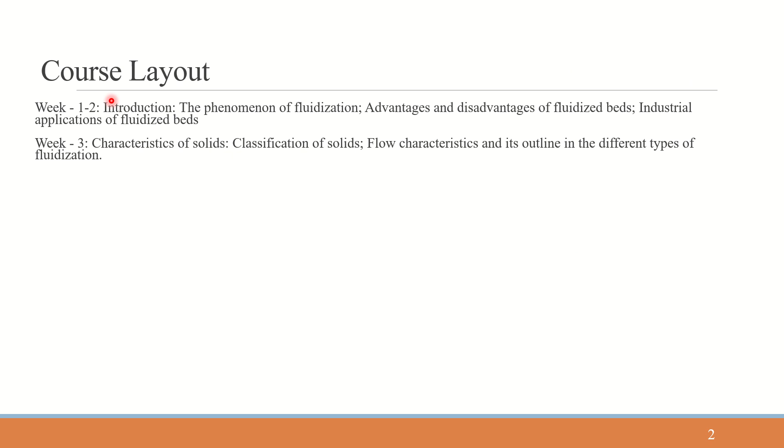So yeah, we'll start now. The course layout, we have seen that it is a 12-week course, and in the first few weeks it was about the introduction to fluidization and flow pattern, gas distribution, bubbling fluidized beds, and we'll be dealing with entrainment, attrition, and these phenomena, everything that is happening inside the system.

We'll also be studying the mass transfer and heat transfer phenomena happening inside the fluidized beds. We all know that we have seen till now the introduction to fluidization and the characteristics of solids, like how solids are classified into A, B, C, and D, and depending on the particle size and density, how the fluidization behavior is influenced inside the bed. We've also seen what the regimes of fluidization are.

In the fourth week, it is about flow pattern transition, mainly associated with frictional pressure drop and modeling that. Later on, we'll be dealing with all the coming up things, and the problems will be solved based on that.

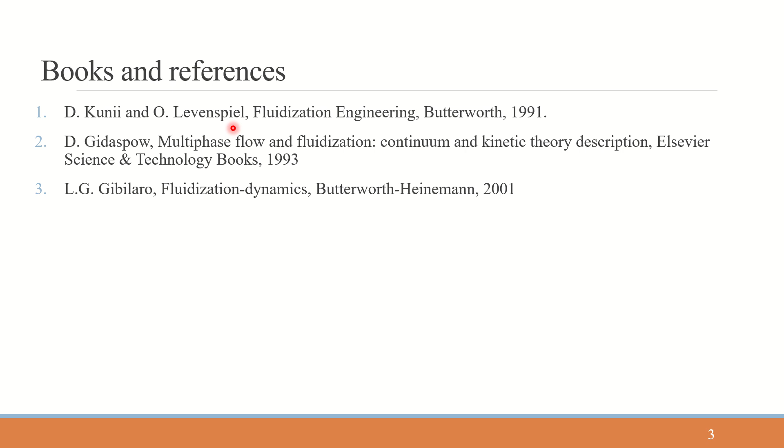All those details are given in this book, again an interesting read if you can read it. The third one is Gibilaro's Fluidization Dynamics, and the last one is S K Majumder's Hydrodynamics and Transport Processes of Inverse Bubbly Flow. These are the books.

Okay, now let us start with assignment problems. These are just a few sample problems related to this week's assignment submission. We'll start with question 1.

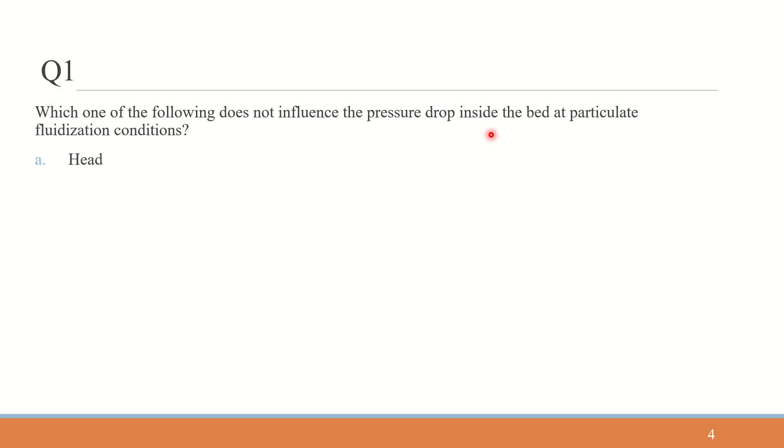It is being asked: which one of the following does not influence the pressure drop inside the bed at a particulate fluidization condition? Option A is head, option B is friction, option C is acceleration of the solids, and option D is velocity.

Particulate fluidization means that after fluidization, if we are considering a liquid phase or a very low velocity of gas, if we are passing low velocity gas or passing liquids, we will find fluidization such that there will be no formation of bubbles.

Bubbles will not be formed inside the bed, and the bed will be uniformly fluidized by using the fluid, mostly liquid, or in some cases low velocity gas. So particulate fluidization is like a uniform thing, which does not influence the particle pressure drop inside the bed. Pressure drop inside particulate fluidization does not depend on velocity, because however much we increase the velocity after reaching particulate fluidization condition, there will not be any change.

So however much we increase or decrease the fluid velocity, there will not be any change. This is true at particulate fluidization condition. So the answer to this question is option D, velocity is the right answer. Now we'll go to question 2.

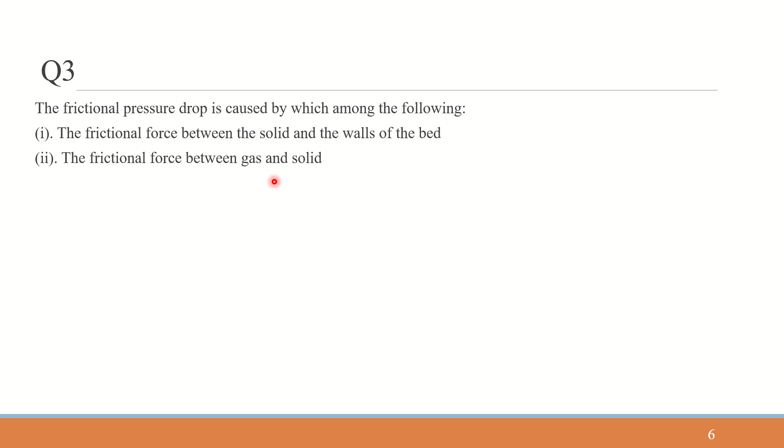First, frictional force between the solid and the walls of the bed. Second, frictional force between the gas and the solid. And third, frictional force between the gas and the walls of the riser. So here we are given three statements. The first one is between solids and the walls of the bed, and this is true because in fluidized bed, the particles are also moving, and they would be moving against each other and against the walls as well.

So the first statement is true because frictional force between the solid and the walls of the bed is coming into picture here. Second statement is frictional force between the gas and the solid - as we pass the gas, with increasing velocity, the particles are also moving, so the gas and the solids are in continuous contact, and there is pressure from the frictional force arising out of that as well. Lastly, frictional force between the gas and the wall of the riser - this statement is also true because gas is rubbing against the walls as well. So all three statements

belong to the answer. So we'll see the options now. Option A is 1, 2 and 3. Option B is only 3. Option C is 1 and 3. Option D is 2 and 1. So the answer is option A, 1, 2 and 3 is the right answer. Now we'll go to question 4.

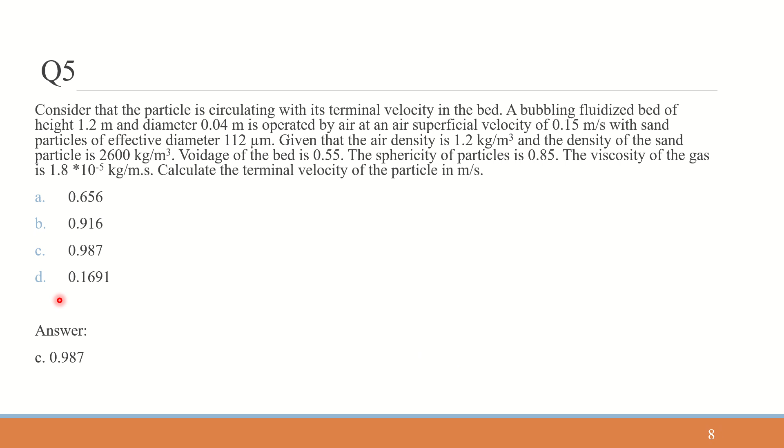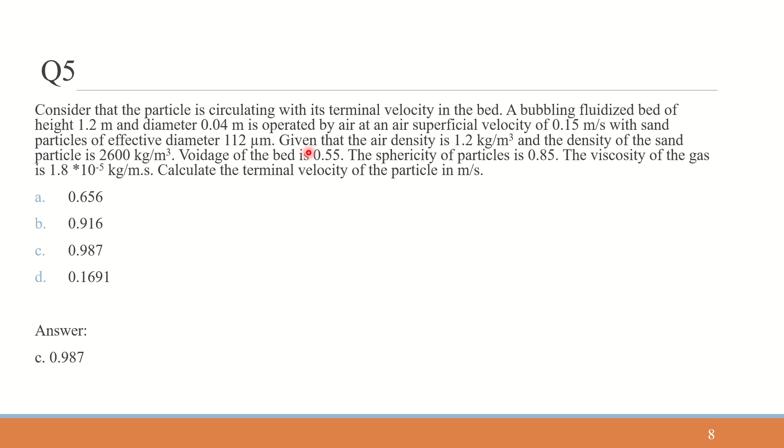So once again, if we look at the question, what is being asked and what is given: we are asked to calculate the terminal velocity at which the particle is circulating, and the bed dimensions is given as height 1.2 meter and diameter 0.04 meter, and air is the fluid medium with superficial gas velocity given, and particle properties are also given in terms of diameter and density, air density is given, particle sphericity is given, voidage of the bed is given, and viscosity of the gas is given. So we are asked to calculate the terminal velocity.

So first we have written the given things: the bed properties, the fluid properties, and the particle properties, and we are asked to find the terminal velocity. For that we need to know the formula: ut is equal to g into dp square into (rho p minus rho f) divided by 18 mu. On substituting everything, we are able to find the answer as 0.987 meter per second, which is option C. So just take a look at it, before we move on to the next problem.

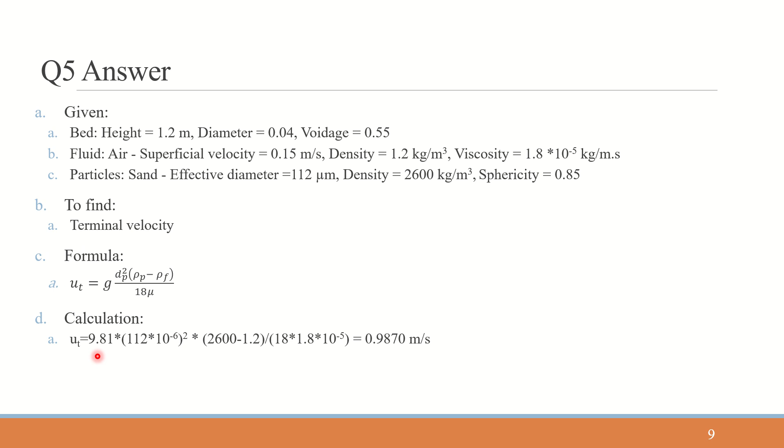Question 6: calculate the fanning friction factor of particles by using the fanning equation.

For a gas solid fluidized bed of diameter 0.08 meter, where frictional force per unit volume between solid phase and wall is 5.422 Newton per meter cube, and voidage of bed is 0.55. Particle density and velocity are 2600 kg per meter cube and 0.3 meter per second respectively.

So in this question, we are asked to calculate the fanning friction factor of the particles using the fanning equation, for a gas solid fluidized bed whose diameter is 0.08 meter, with frictional force per unit volume between solid phase and wall given as 5.422 Newton per meter cube. The bed voidage is given as 0.55, and particle density and velocity are given as 2600 kg per meter cube and 0.3 meter per second.

Now let's look at the options. Option A is 2.072 into 10 power minus 3. Option B is 2.096 into 10 power minus 3. Option C is 2.059 into 10 power minus 3. Option D is 2.051 into 10 power minus 3. All values are very close, so we'll go back and solve the problem. The answer is 2.059 into 10 power minus 3.

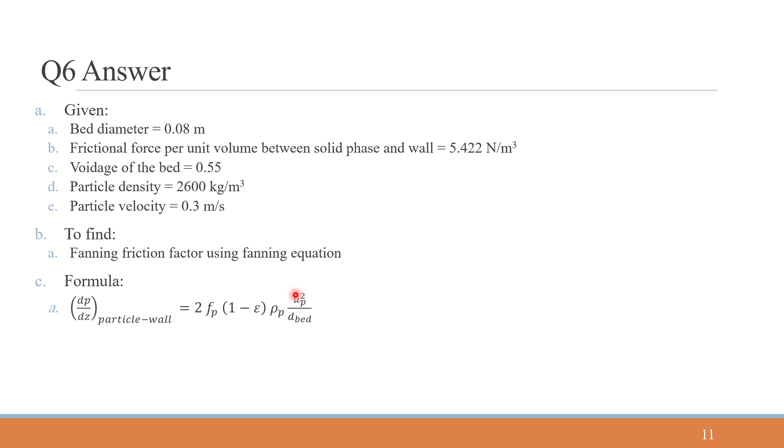Here, dP by dZ is the frictional force per unit volume, and fp is the fanning friction factor for particles. Epsilon is the void fraction or voidage, which is 0.55, and rho p is the density of the particles, 2600 kg per meter cube. Up is the particle phase velocity, 0.3 meter per second, and d bed is the diameter of the bed, 0.08 meter.

Now we do the calculation. We put 5.422 for dP by dZ particle-wall, the frictional force between the solid phase and wall phase. So 5.422 equals 2 into Fp into (1 minus 0.55) into 2600 into 0.3 square, where up is 0.3 meter per second, divided by d bed, which is 0.08.

Substituting everything, we find the fanning friction factor value as 2.0596 into 10 power minus 3. Going back to check, the answer is 2.059 into 10 power minus 3.

The key thing to note here is that we are asked to find the fanning friction factor for the particles specifically - this is important. What is given is the frictional force per unit volume between the solid phase and the wall phase. We need to be very careful while identifying the formula based on these two things. The rest remains straightforward: the gas solid fluidized bed diameter, voidage of the bed (epsilon = 0.55), and particle density and velocity are given. So we must be conscious that we're solving for the fanning friction factor of the particles, given the frictional force per unit volume between solid phase and wall, which is 5.422.

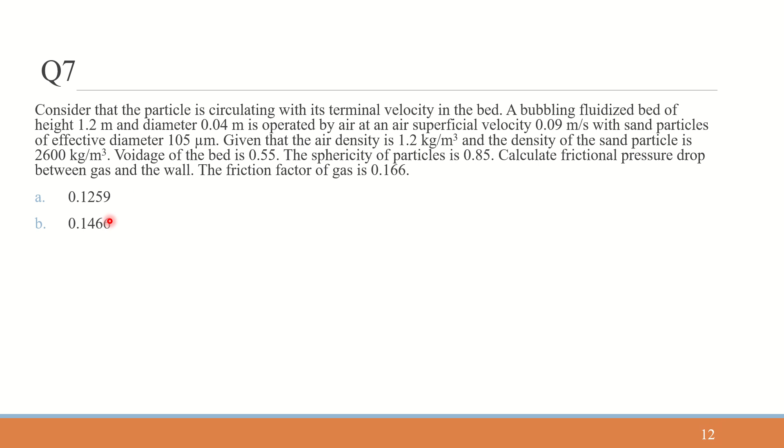So we'll solve that, and before that we'll just look at the options. Option A is 0.1259. Option B is 0.1466. Option C is 0.1280. Option D is 0.1499. The answer is actually option B, that is 0.1466. So now we need to see how to solve this problem. For that we'll check the answer.

Okay, question 7. First we'll mention what is being given in the question so that it will be clear for us to identify things when solving the problem. First, bed properties are given: bed height, its diameter and the voidage. So bed height here is 1.2 meter, diameter of the bed is 0.04 meter and voidage is 0.55.

And the fluid is air, its density is 1.2 kg per meter cube and its viscosity is 1.8 into 10 power minus 5 kg per meter second. These are at standard conditions. The density and viscosity of air at standard conditions are these values, and unless given otherwise, you can take these at normal conditions.

The superficial air velocity is given as 0.09 meter per second, and the particles' effective diameter is given as 105 micrometer, density is given as 2600 kg per meter cube, and sphericity is given as 0.85. So with density, diameter and sphericity, you are able to imagine the particle structure and behavior.

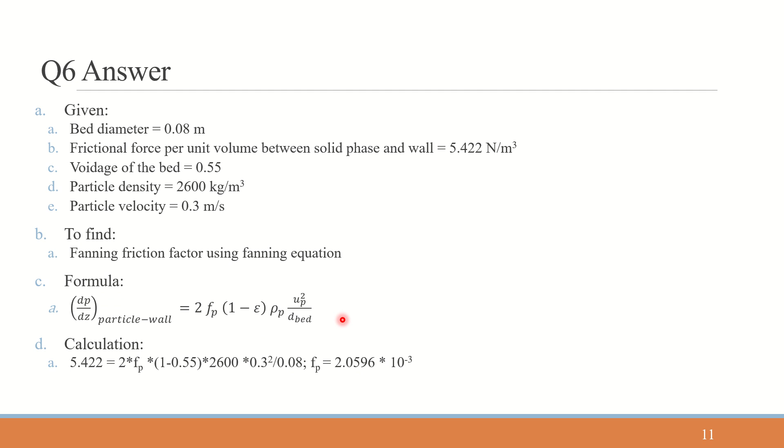Here we are again dealing with fluid and the wall. So it is 2Ff instead of 1 minus epsilon. 1 minus epsilon gives the solid fraction inside the bed. So when we are dealing with particle wall, we use 1 minus epsilon, whereas when dealing with fluid wall, we use epsilon. And here, for particle wall, it is particle density, and up is particle velocity, divided by d bed.

So whatever things we use for particles, we use for fluid in the formula. So it is 2 into ff into epsilon rho f into usf divided by epsilon the whole square. Here we are not directly using the velocity because it is superficial gas velocity, so we divide by epsilon, that is the void fraction or volume fraction of the fluid, whatever it is called, usf by epsilon the whole square, divided by d bed. So the formula is the same, but the components differ.

So now we are asked to find dp by dz at fluid wall. It is equal to 2 into ff epsilon rho f usf by epsilon the whole square, divided by d bed. We know ff is the friction factor of gas, which is 0.166, epsilon is the void fraction, 0.55, rho f is the density of gas, 1.2 kg per meter cube, usf is the superficial gas velocity, 0.09, epsilon again 0.55, and d bed is 0.04.

So we are now calculating dp by dz between the fluid and the wall. It is 2 into 0.166 into 0.55 into 1.2 into 0.09, divided by 0.55 the whole square, divided by 0.04. So it is 0.1466. We are getting the value as 0.1466. So dp by dz between the fluid and the wall is 0.1466.

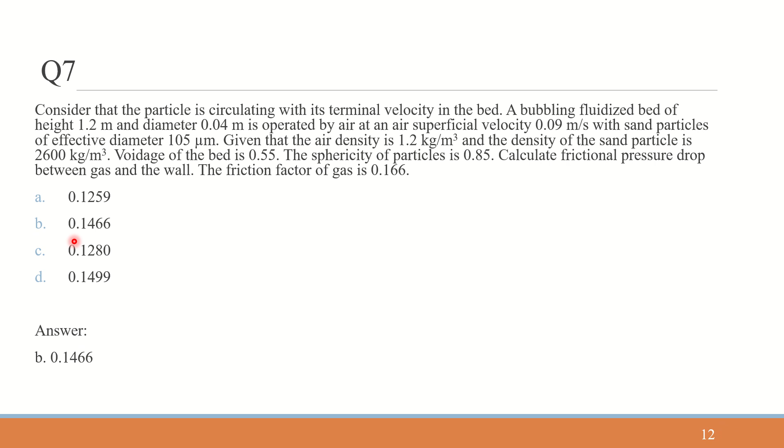So this is how we've done it. We just used the formula to find the frictional pressure drop between the fluid and the wall, between the gas and the wall. It is given by 2 into ff into epsilon into rho f into usf divided by epsilon the whole square, divided by d bed, where d bed is the diameter of the bed. So it is a direct substitution, similar to the last problem where we were asked to find the friction factor given the pressure drop. Here we are asked to find the pressure drop given the friction factor.

So this is how we have done the problem. Just take a look at it, we'll go to the next question in some time. So just be clear, this problem and the last problem are kind of similar, so it's just a direct substitution. See this for 20 seconds and we'll move to the next problem.

So yeah, I hope it is clear. Question 7 is clear. Now we'll go to question 8.

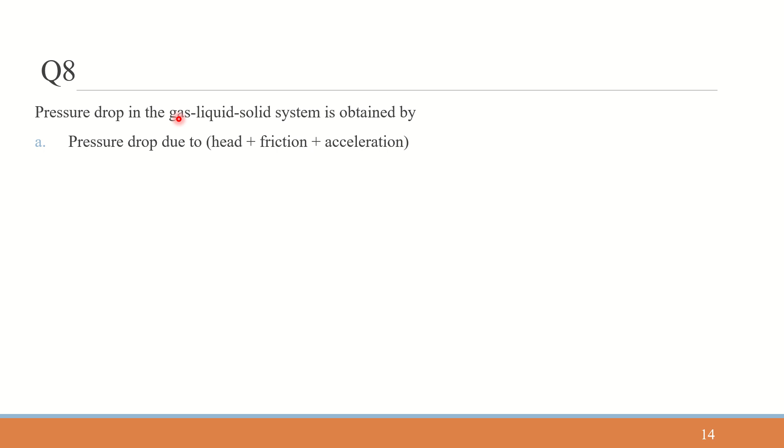Pressure drop in the gas liquid solid system is obtained by: here we are dealing with a three-phase system, that is liquid, solid and gas. Option A: pressure drop due to head, friction and acceleration. Option B: pressure drop due to head, vacuum and acceleration. Option C: pressure drop due to flow, head and friction. Option D: pressure drop due to acceleration, slip and friction. So we are given the pressure drop in a three-phase system, gas, liquid and solid. What are all the factors causing the pressure drop inside the system?

The answer is option A, head, friction and acceleration. Head is due to the fluid flow difference causing some pressure drop, and the frictional pressure drop is caused due to the movement of the solids and the fluids, solids and the wall of the particles, and the fluid and the wall of the particles, and also acceleration. So all these things contribute to the pressure drop in the gas liquid solid systems. So the answer to question 8 is option A, pressure drop due to head, friction and acceleration.

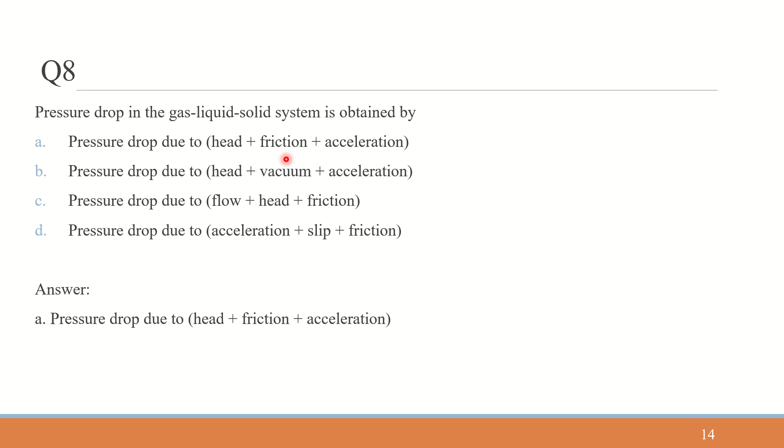Now we'll go to question 9. It is asked that according to Wen and Yu 1966, drag coefficient for fluid solid and drag coefficient for a single particle are interrelated as what. So in Wen and Yu's 1966 approach, the drag coefficient for the fluid solid and the drag coefficient for a single particle are related as follows.

Here CDFP is the drag coefficient for fluid solid particle, and CDP is the drag coefficient for a single particle. Epsilon GL is the volume fraction of the gas liquid mixture, and USG is the superficial velocity of gas. Option A: CDFP by CDP is equal to the ratio of the drag coefficient for the fluid solid particle divided by the drag coefficient for a single particle, given by epsilon GL to the power of 8 USG minus 5.2. Option B: CDFP divided by CDP equals epsilon GL to the power of 8 USG minus 5.4.

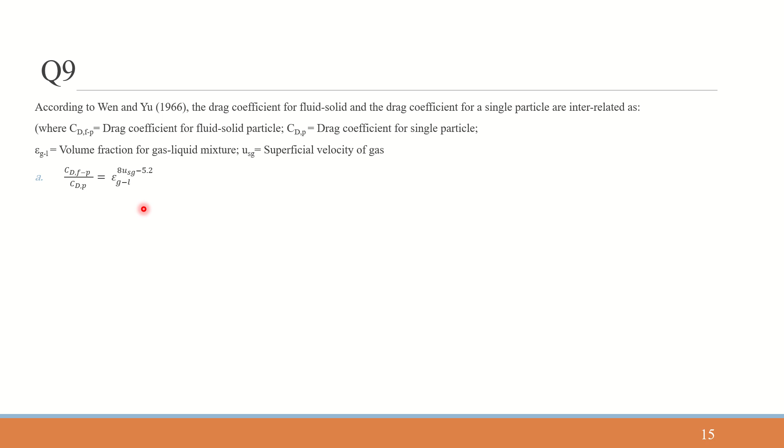Option C: CDFP divided by CDP is equal to epsilon GL to the power of 8 USG minus 5.7. Option D: CDFP divided by CDP is equal to epsilon GL to the power of 8 USG minus 5.0.

The answer is option C, CDFP divided by CDP, that is drag coefficient for fluid solid to the drag coefficient for a single particle, given as epsilon GL to the power of 8 USG minus 5.7. So here we have a system of fluid and solid mixture, and drag coefficient for a single particle. When we allow the single particle to settle, we have a single particle drag coefficient CDP, or in general we can call it CD naught. So it is related to CD naught into epsilon GL to the power of 8 USG minus 5.7. USG is the superficial velocity of gas, and epsilon GL is the volume fraction for the gas liquid mixture. Option C is the right answer, given by Wen and Yu 1966.

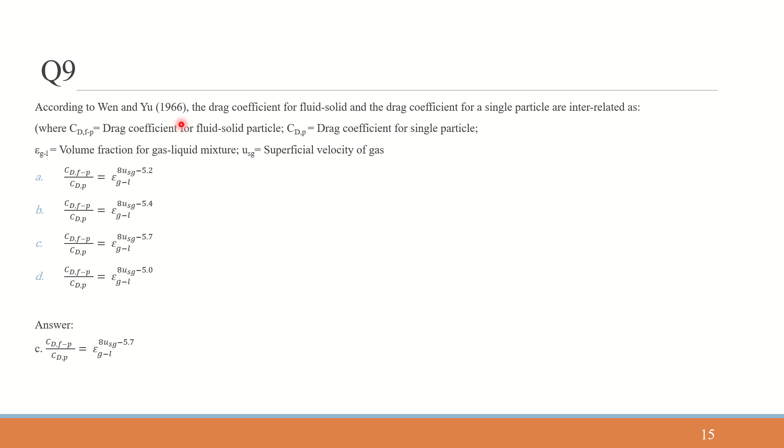Now we go to question 10. It is asked that in the Fanning equation, where dP by dZ is equal to the particle wall pressure drop, that is the frictional pressure drop.

In the Fanning friction factor equation, as we have seen in previous slides while solving the problem, dP by dZ particle wall denotes the frictional pressure drop between the particles and the wall, and UP denotes particle velocity. Option A: dP by dZ particle wall is proportional to UP power 1.5. Option B: dP by dZ particle wall is proportional to 1 by UP cube. Option C: dP by dZ particle wall is proportional to UP power 1 by 2.

Option D, dp by dz particle wall is proportional to UP squared. Like we have seen while solving the problem, frictional pressure drop between particle and wall is directly proportional to UP square. So option D is the right answer, not option A.

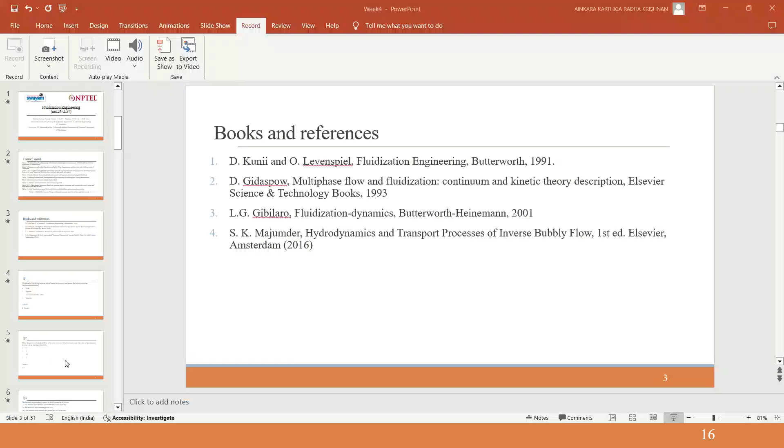Option D is the right answer, where dp by dz particle wall is directly proportional to UP square. The formula for frictional pressure drop between particle and wall is given by 2 into fp into 1 minus epsilon into rho p UP square divided by d bed, where d bed is the diameter of the bed, UP is the particle velocity, rho p is the density of the particles, and epsilon is the void fraction, with 1 minus epsilon being the solid volume fraction.

Because in the system only solids and fluid are present, epsilon is the void fraction, so epsilon plus solid fraction equals 1, meaning solid fraction equals 1 minus epsilon. Fp is the fanning friction factor for particles, and dou P by dou Z is the frictional pressure drop between the particles and the walls.

In the question, it is asked that in the fanning equation, dp by dz particle wall equals the particle wall frictional pressure drop, and UP is the particle velocity. So what is dp by dz proportional to, UP to the power of x? X here is 2, meaning it is proportional to the square of the particle velocity, as we can clearly see from this formula.

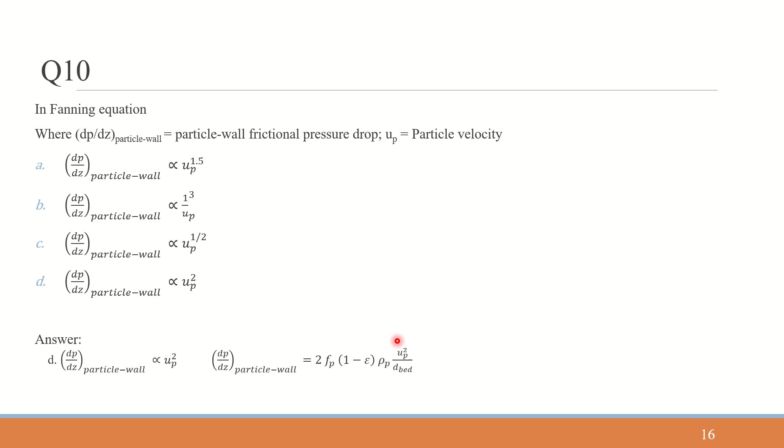Now we'll go to question 11. It is given that the friction factor for fluid, for Reynolds number less than 2300, is calculated by a certain formula. Fluid friction factor FFW is given, where FFW is the fluid friction factor and REGL is the Reynolds number of the gas liquid mixture. We need to identify how we calculate it.

Option A is FFW equals 24 by REGL. Option B is FFW equals 0.079 divided by REGL to the power of 0.25. Option C is FFW equals 24 by REGL to the power of 0.5. Option D is FFW equals 0.079 divided by REGL to the power of 0.75.

The answer requires us to be conscious that it is asked for Reynolds number less than 2300. So the friction factor formula for fluid when Reynolds number is less than 2300 is 24 by REGL. So option A is the right answer, FFW equals 24 by REGL.

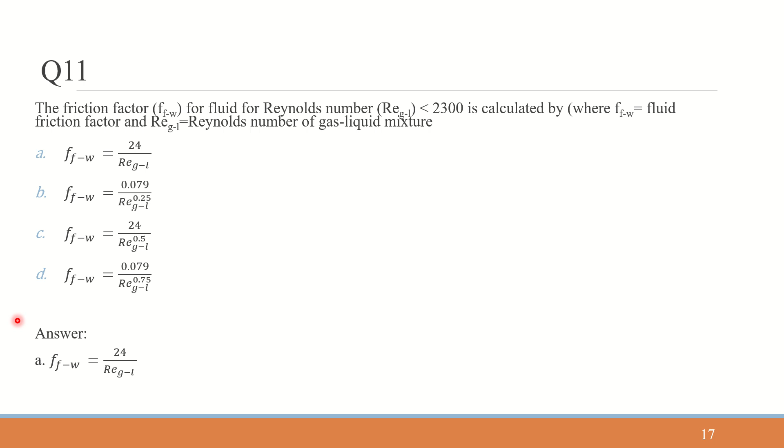And now we go to question 12.

In question 12, it is given that in a three-phase fluidized bed, when liquid velocity increases, what happens to delta PFR divided by L? Delta PFR here is the frictional pressure drop, and L is the length of the bed. So what happens to frictional pressure drop per unit length of the bed when liquid velocity increases in a three-phase fluidized bed?

In the options: option A increases, option B decreases, option C remains constant, option D none.

Actually, in a two-phase fluidized bed, when liquid velocity increases, pressure drop remains constant. But in a three-phase fluidized bed, it does not remain the same - rather it decreases, because you have the influence of gas in addition to the liquid. So you face influence from gas phase, liquid phase, and particle phase, causing hindering of motion, and pressure drop decreases when liquid velocity is increased. Be careful: in three-phase fluidized bed, frictional pressure drop per unit length decreases with increasing liquid velocity, unlike two-phase fluidized beds.

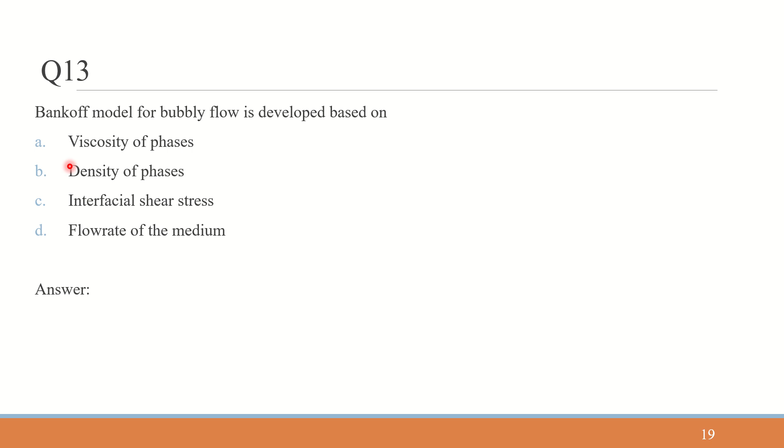All these are theory questions. Bankoff model for bubbly flow is developed based on interfacial shear stress. Option C is the right answer.

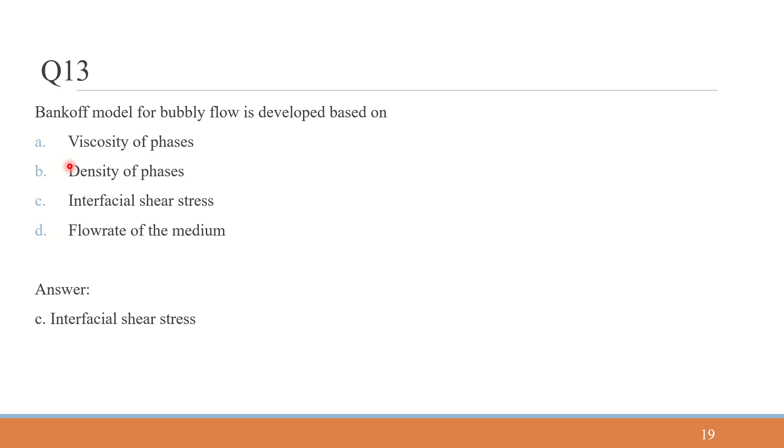Now moving to question 14. Which flow pattern is used for predicting frictional pressure drop according to the Wallis model 1969? Option A, slurry flow. Option B, annular flow. Option C, multiphase flow. Option D, vertical pipe flow.

Option B is the right answer. Annular flow pattern is used for predicting frictional pressure drop according to the model given by Wallis 1969. So the answer is option B, annular flow.

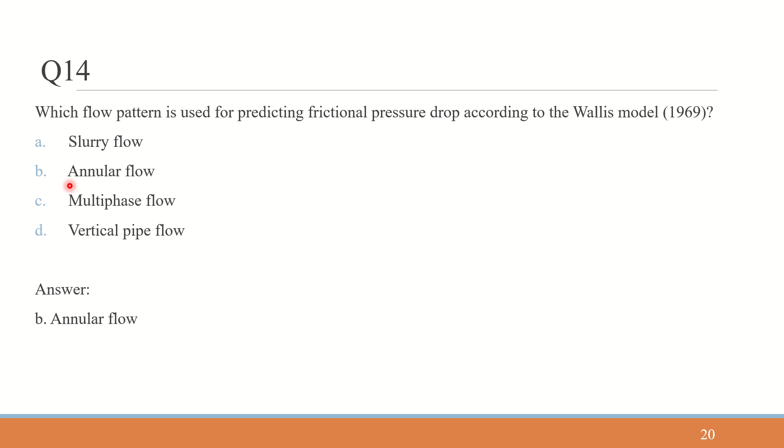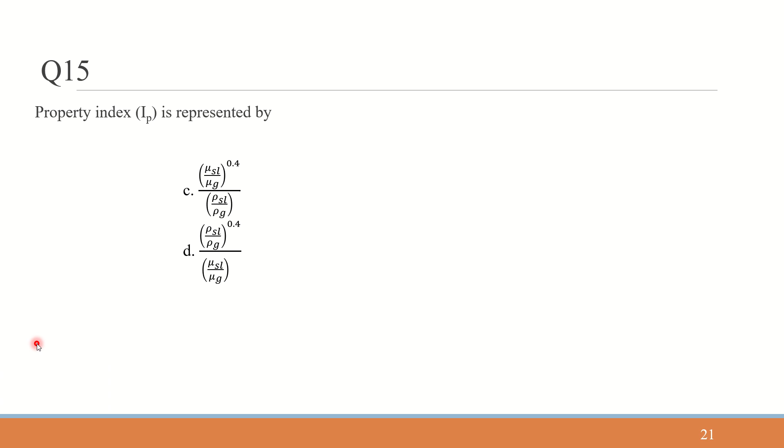Property index is represented by an option. In the options, mu SL is the viscosity of slurry, mu G is the viscosity of gas, rho G is the density of gas, and rho SL is the density of slurry.

What is the option for representing property index? Option A: mu SL by mu G to the power 0.2, divided by rho SL by rho G. Option B: rho SL by rho G divided by mu SL by mu G to the power 0.2. Option C: mu SL by mu G to the power 0.4 divided by rho SL by rho G. Option D: rho SL by rho G to the power 0.4 divided by mu SL by mu G. Property index is given by the ratio of viscosity of slurry to viscosity of gas, divided by density of slurry to density of gas. So option A and option C only fit that, meaning options B and D are false.

Looking at the power for the ratio of viscosity, it is 0.2 in option A and 0.4 in option C. So the right answer is option A, with power 0.2. Property index is represented by the ratio of viscosity of slurry to viscosity of gas, to the ratio of density of slurry to density of gas - that is the property index formula, IP.

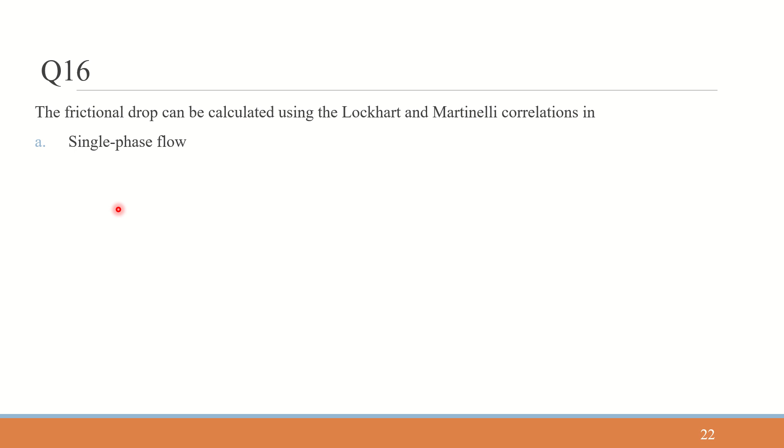Question 16 asks whether frictional pressure drop can be calculated using Lockhart and Martinelli correlations in single phase flow, three phase flow, or two phase flow. Actually, our answer is two phase flow as well as three phase flow, so both options B and C are right. Therefore the answer to this question is option D.

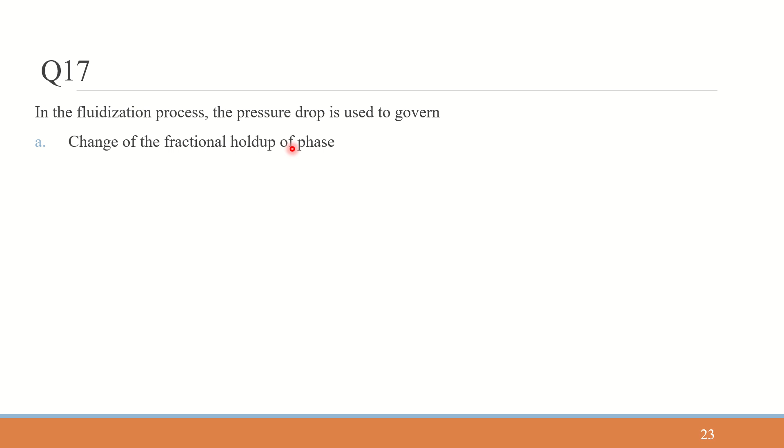Question 17 asks, in the fluidization process, the pressure drop is used to govern change of the fractional holdup of the phase, patterns of energy dissipation, assessment of fluidized bed performance, or all of the above. The answer is all of the above.

Why? Because pressure drop is an important phenomenon that governs so many things in the fluidization process. So many other factors depend on it. For example, if you are running some cases and observing drastic pressure drop or other drastic changes, you will be worried about why it is happening and whether something might be going wrong. So it is an indication of whether things are going right or wrong, and even under what state the system is.

For instance, if we pass fluid inside the bed, we observe the pressure drop to identify at what condition the bed transforms from the packed bed condition to the fluidized bed condition. These are the reasons we need to understand the importance of pressure drop.

From the given options: option A is change of the fractional holdup of the phase, option B is patterns of energy dissipation, option C is assessment of fluidized bed performance. It gives us an idea about assessment of the fluidized bed performance and patterns of energy dissipation, since we can identify what is going wrong or what is going on in the system. Option A, change of the fractional holdup of the phase, can also be identified through fluctuations in pressure drop. So all these things are correct, and option D is the right answer.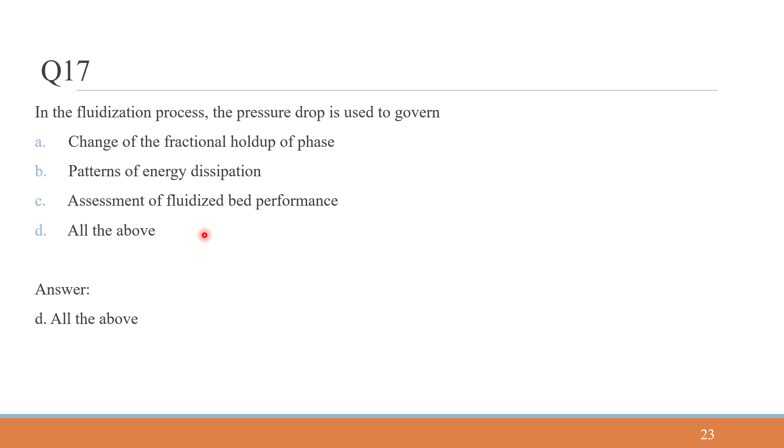Now we'll go to question 18. It states that with increase of particle diameter, minimum fluidization velocity does what? Option A, it remains constant. Option B, it increases. Option C, it decreases. Option D, none of the above. I think it increases.

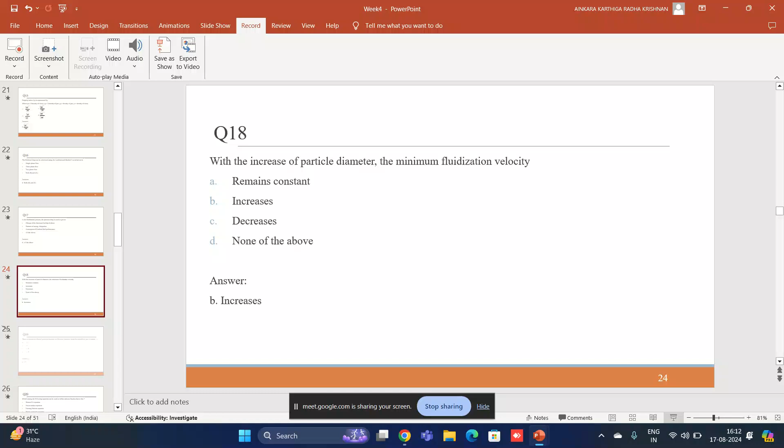With increase of particle diameter, minimum fluidization velocity increases. I'm not entirely sure, but let me just confirm this once... Yes, actually with increase of particle diameter, minimum fluidization velocity increases.

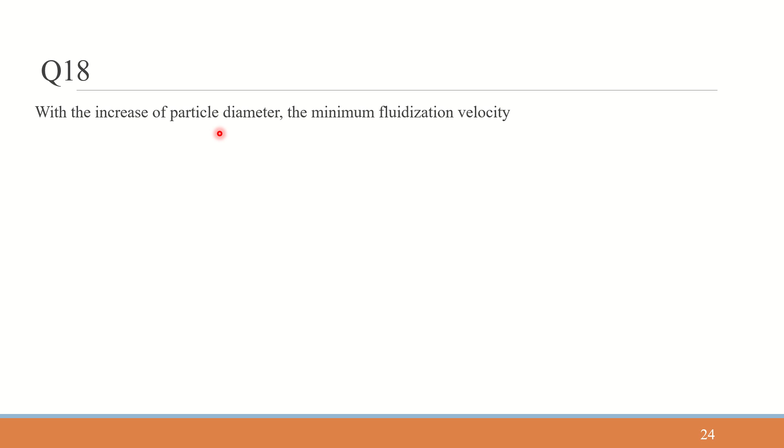When we increase the particle diameter, because of the packing and other factors, the minimum fluidization velocity also increases. At higher velocity, particles become easier to fluidize, whereas before that they remain in a packed condition. This is specifically when dealing with particle diameter, but questions might also come from other factors, so check those as well.

So in this question: with increase of particle diameter, minimum fluidization velocity - option A it remains constant, option B it increases, option C it decreases, option D none of the above. The answer is option B, it increases. Now we'll go to question 19... okay, question 20, I think I just skipped one.

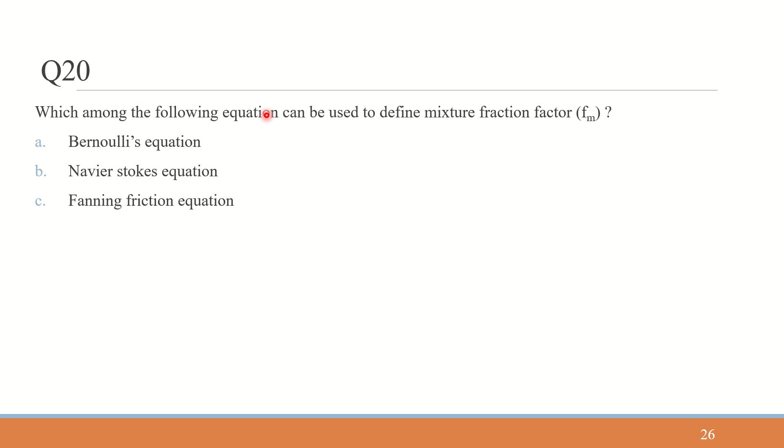Which among the following equations can be used to define mixture friction factor? Option A, Bernoulli's equation. Option B, Navier-Stokes equation. Option C, Fanning friction equation. Option D, Hagen-Poiseuille equation.

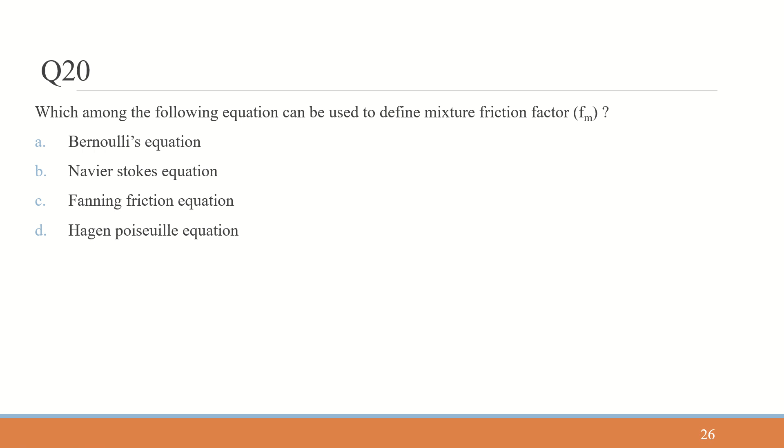The answer we all know is Fanning's friction equation, so the answer is option C. Mixture friction factor is calculated using the Fanning friction equation. So the answer is option C.

Now we'll go to question 20. These problems that we have seen till now belong to a problem category similar to week 4. So the 19 questions we've seen will give you an idea how to solve the week 4 assignment and submit it. The questions we'll see hereafter, some 20 questions, are the discussion for the answers to the week 3 assignment problems.

So we'll see the questions. Multi-phase flow behaviors, these are assignment problems belonging to week 3. Multi-phase flow behaviors are affected by: A, interfacial tension forces; B, wetting characteristics of the liquid on the channel wall; C, contact angle and the exchange of mass, momentum and energy between the phases; D, all the above.

All the above is the right answer. Multi-phase flow behaviors are affected by interfacial tension forces, yes, because we have the fluid and solid medium, and interfacial tension forces are important since we might be dealing with three-phase systems like gas, liquid and solid. So interfacial tension forces, wetting characteristics of liquid on the channel wall, and contact angle along with exchange of mass, momentum and energy between the phases, all three factors affect multi-phase flow behaviors. So the answer is all the above.

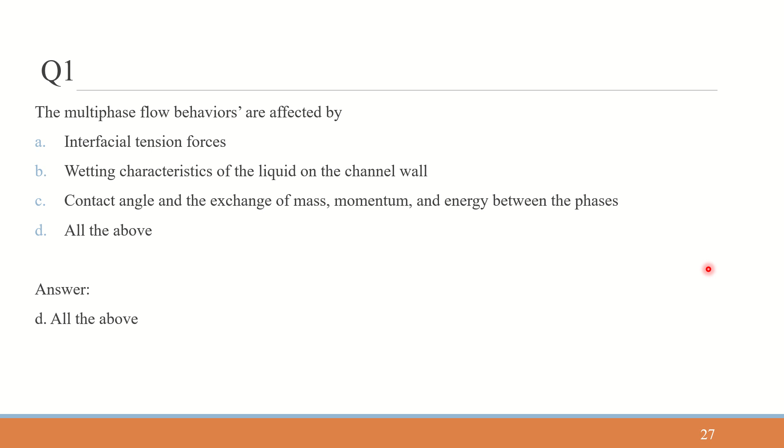Now we are seeing question 1. Multi-phase flows like two-phase and three-phase flows - examples for two-phase flows include oil and water systems, and three-phase flows like air, oil and water, or air, ice and water. In all these, interfacial tension forces, wetting characteristics of liquid on the channel wall, and contact angle all play a role. So that was question 1.

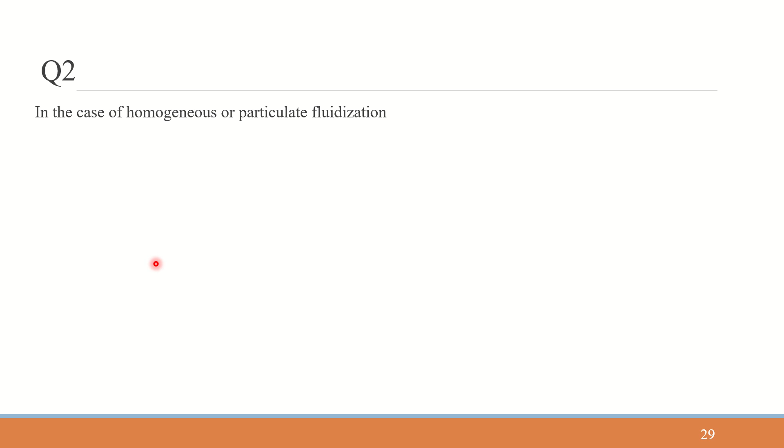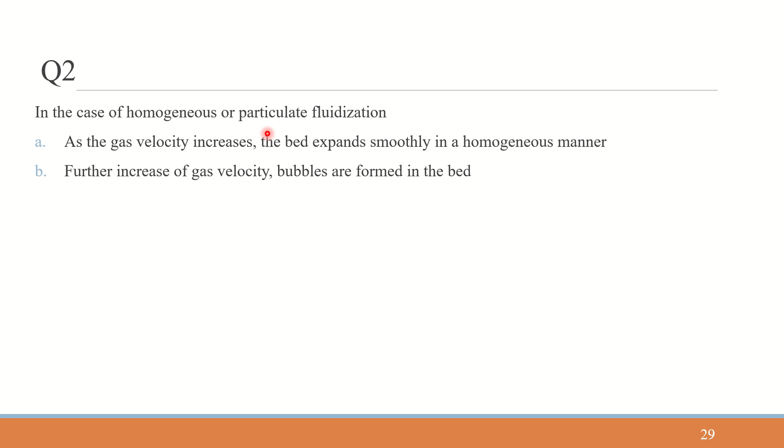In question 2: in case of homogeneous or particulate fluidization, as gas velocity increases, the bed expands smoothly in a homogeneous manner. Option B, further increase of gas velocity causes bubbles to form in the bed. Option C, both option A and B. Option D, none of the above. Option C is the answer, where both A and B are true.

Because in case of homogeneous fluidization, the condition is where we pass gas at low velocity - generally it's a term associated with liquid-solid fluidization, but if dealing with gas-solid fluidization, it would be at a low velocity. With increase in that low velocity, the bed expands smoothly, with no large voidage inside the bed. So as gas velocity increases, bed expands smoothly in a homogeneous manner - that is what we call homogeneous or particulate fluidization.

Further increase of gas velocity beyond that regime will obviously form bubbles. So in homogeneous or particulate fluidization there is no formation of bubbles, but with further increase of gas velocity, bubbles are formed in the bed. So both statements are true - in homogeneous fluidized beds, both options A and B are true. So the right answer is option C.

Now for question 2, let's get an idea of the fluidization regime, which we call smooth fluidization. With low velocity, particles are not moving inside the bed, whereas at minimum fluidization condition, the particles are in a loosely packed state. With increase in fluid velocity, we see smooth fluidization, which we call particulate fluidization. This is mostly associated with a liquid regime, but if it's a gas, it would be at a low velocity compared to the bubbling regime.

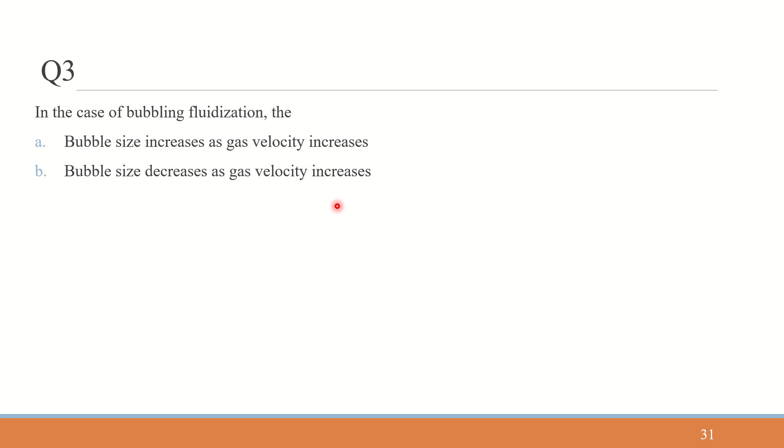Now we see question 3. It is given that in case of bubbling fluidization: does bubble size increase as gas velocity increases, decrease as gas velocity increases, remain unchanged as gas velocity increases, or none of the above? Option A is the right answer.

Now we'll go to question 4. If most of the bed cross section is captured by bubble or void, is this phenomenon called bubbling fluidization, homogeneous fluidization, slugging fluidization, or all of the above?

It is slugging fluidization. In the previous fluidization regime diagram, we saw that when bubble size almost reaches the size of the column, if almost 60% of the column diameter is occupied by bubble or void, we call it slugging fluidization regime. The first one is bubbling fluidization regime. With further increase in velocity, the bubbles grow in size and almost reach the size of the column, which we call slugging fluidization.

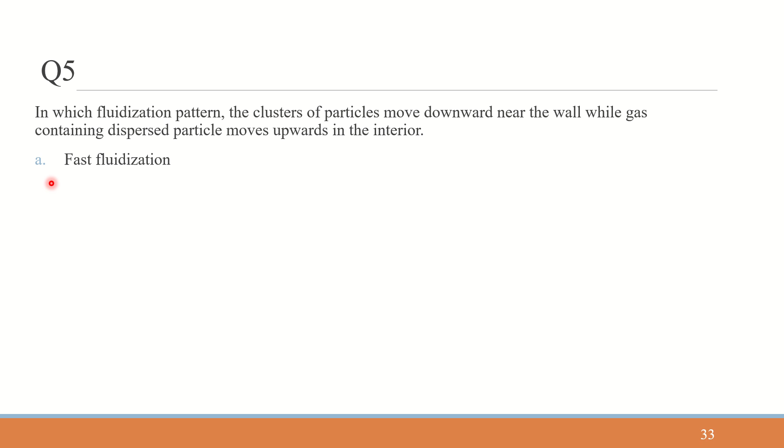Option A is fast fluidization. Option B is pneumatic conveying. Option C is spouted fluidization. Option D is all the above. The answer should be fast fluidization.

So the question is, in which fluidization do clusters of particles move downward near the wall while gas containing dispersed particles moves upward in the interior? This happens in fast fluidization. So the answer is option A, fast fluidization.

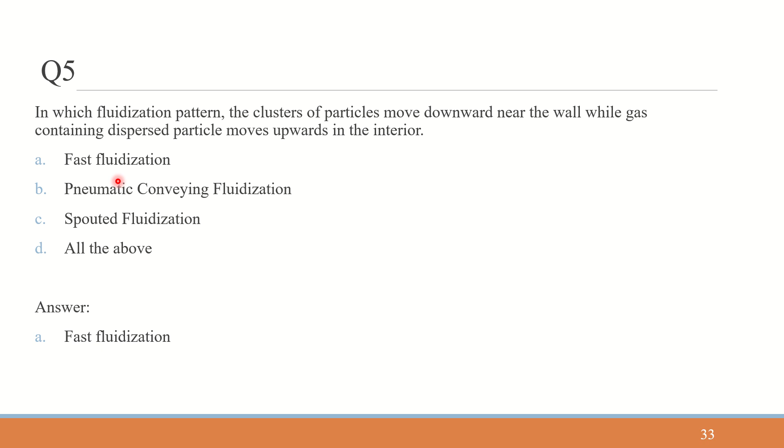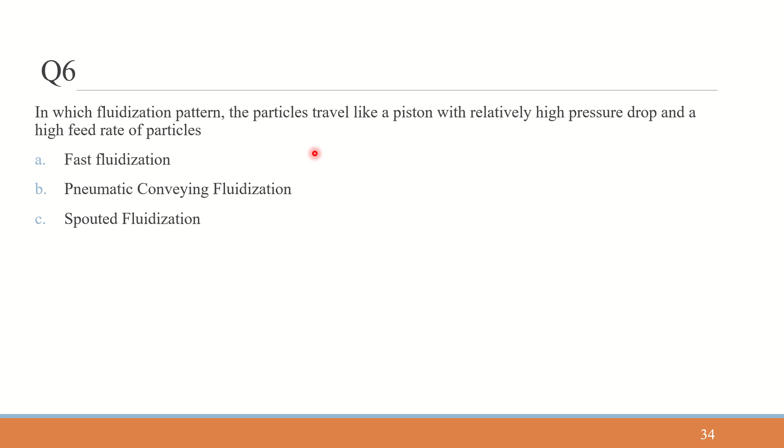Now we go to question 6. In which fluidization pattern do particles travel like a piston with relatively high pressure drop and a high feed rate of particles? I think it is spouted. Option A is fast fluidization, option B is pneumatic conveying, option C is spouted fluidization, option D is all the above. Option B, pneumatic conveying, is the right answer.

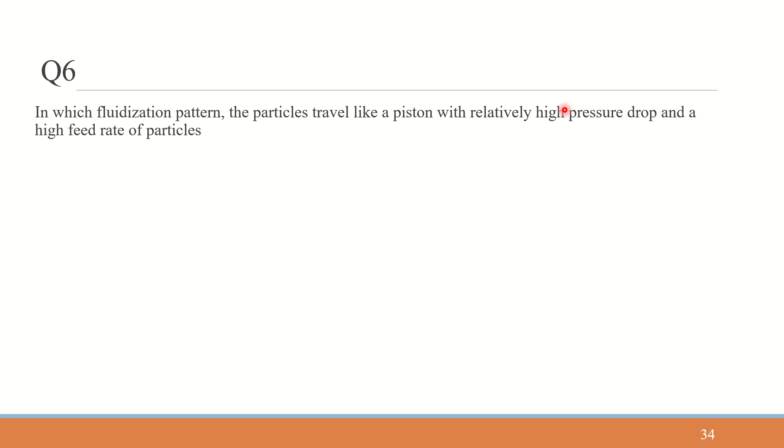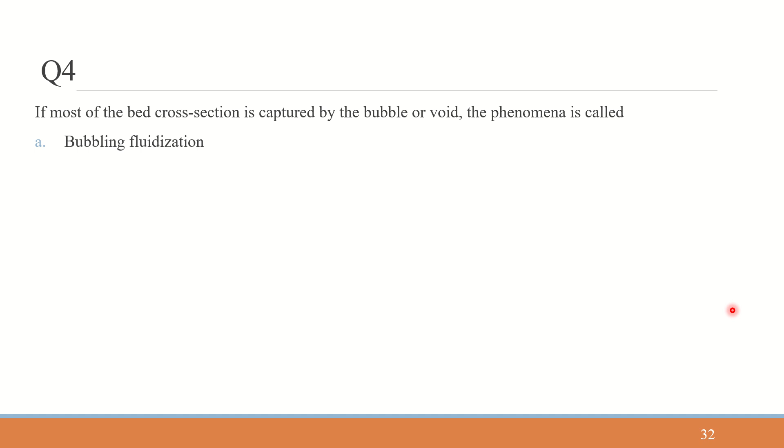Yeah, answer is option B, pneumatic conveying fluidization.

Now we go to question 7. It is given that according to Bi and Grace 1995, the maximum stable bubble diameter at the slug condition should be less than. So we have seen that bubbles will grow in size and break, dispersing the solids contained with them at the top of the bed. This happens when the bubble reaches almost the size of the column diameter.

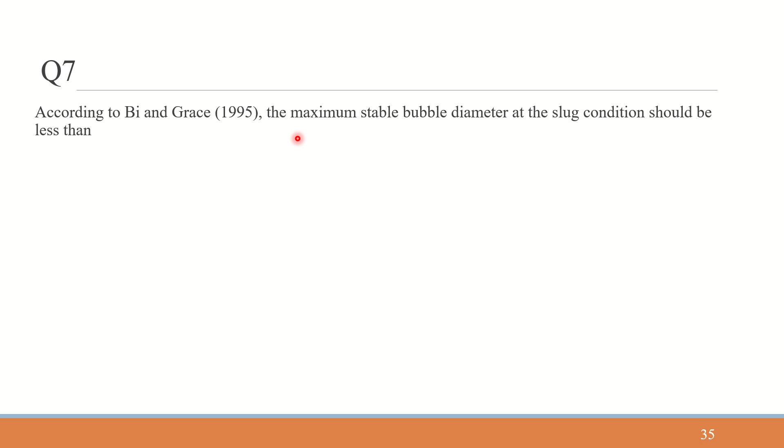So when does the bubble size remain stable? It should be less than 66% of the column diameter. Option B is 56% of the column diameter, option C is 46%, and option D is none of the above. According to Bi and Grace, the maximum stable bubble diameter at this condition should be less than 66% of the column diameter, so option A is the right answer.

Now we go to question 8. The rise velocity is controlled by the equipment, and bubbles become slugs of gas when the size of the bubble is greater than about dash. Option A is one third of the diameter of the equipment, option B is two third of the diameter, option C is half the diameter, and option D is none of the above.

Option A, one third of the diameter of the column. What is being asked is that bubble rise velocity is controlled by the equipment, and bubbles become slugs of gas when the size of the bubble exceeds a certain threshold. We call it bubbling fluidization when bubble sizes are small. With further increase in velocity, we see the slugging regime, and after that these bubbles break in size and recirculation happens, which occurs when the bubble diameter is greater than 66% of the diameter of the column. But if it is less than 66%, we say we have stable bubbles.

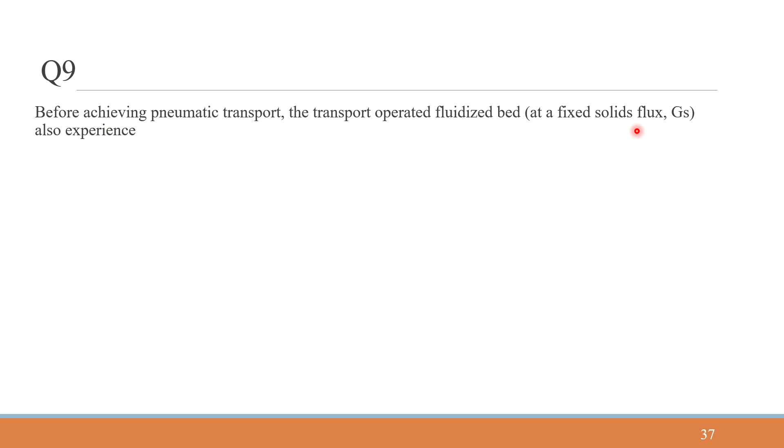So now we go to question 9. Before achieving pneumatic transport, the transport operated fluidized bed at fixed solids flux GS also experiences: option A, bubbly flow; option B, slug flow; option C, turbulent flow; option D, all the above.

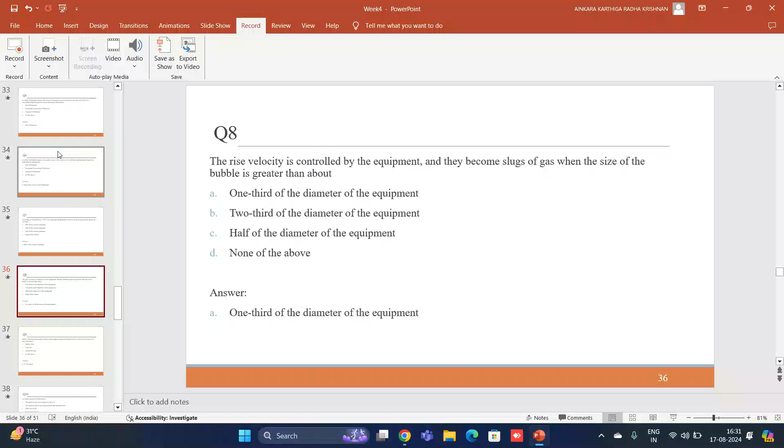Okay, before achieving pneumatic transport, the transport operated fluidized bed also experiences bubbly flow, slug flow, turbulent flow, all the above. From the fluidization regime itself, we know that pneumatic transport happens at very large fluid velocity, where the particles escape the bed. So before pneumatic transport, as we increase the fluid velocity, we don't jump directly into pneumatic transport; instead there is a stepwise increase, and the bed also experiences bubbly flows.

Bubbly flow happens when the fluid velocity is higher than the minimum fluidization velocity, and if very much higher than the smooth fluidization. It also happens when the bubbles are almost stable in size, meaning the bubble size would be less than one third of the diameter of the column.

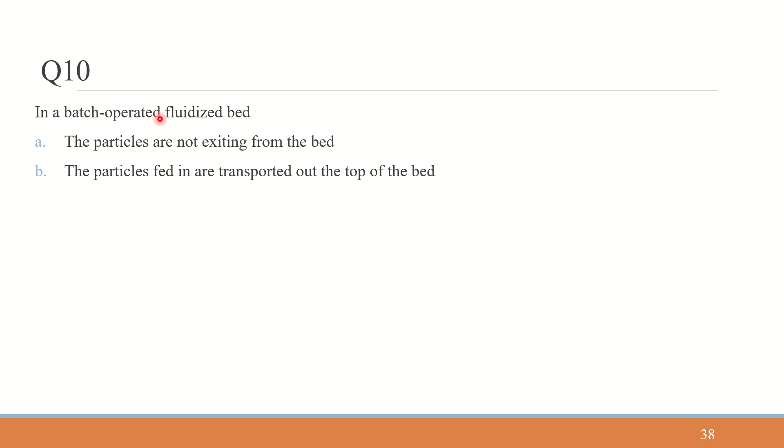Now question 10: in batch operated fluidized beds, option A says particles are not exiting from the bed, option B says particles fed in are transported out of the bed, option C is either A or B, and option D is none of the above. In batch operated fluidized beds, the particles are not escaping or exiting from the bed, since we are not allowing particles to exit during batch operated conditions. So the answer is option A, particles are not exiting from the bed.

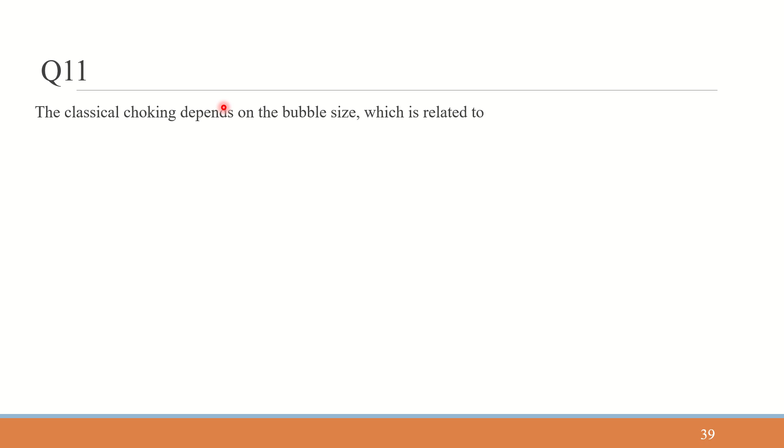Why? Because choking in a fluidized bed depends on the bubble size. What does bubble size depend on? It depends on the superficial gas velocity when dealing with batch operated fluidized beds. Or if it is a continuous bed, we need to know the relative velocity or relative motion between the particles and the gas. Only then can we say the bubble size depends on these factors, and choking depends on them too.

Choking in a vertical pneumatic system happens in three ways. The first is accumulative choking, type B is blower or standpipe induced, and type C is classical choking, which is what is asked in this question. In accumulative choking, solids start to accumulate at the bottom of the conveyor as the saturation gas capacity is reached, disrupting particle movement.

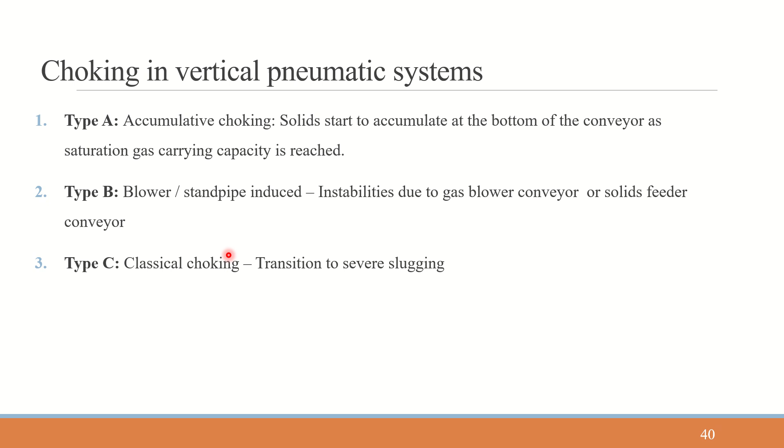Type B is blower or standpipe induced, where instability is due to the gas blower conveyor or solids feeder conveyor causing choking. Type C is classical choking, which occurs due to transition from the slugging regime to severe slugging, so it depends on the bubble diameter or bubble size. Since classical choking is associated with transition to slugging, it depends on bubble size, which depends on the fluid inlet velocity - that is, superficial gas velocity for a batch operated bed, or the relative motion between solids and gas particles for a continuous operated bed. So both options A and B are right, given by option C.

That is question 11. Question 12: what type of choking occurs when the diameter of the pipe is small and comparable to that of a bubble, involving geometric limitations beyond hydrodynamic factors? So if the diameter of the pipe is small compared to the size of the bubble, what does this mean?

It means that bubble size plays a huge role here, and that brings to mind classical choking. In classical choking, it depends on the transition to the slugging regime, so bubble size plays a huge role. If the diameter of the pipe is small and the bubble size is almost reaching the size of the column, that's when classical choking will occur.

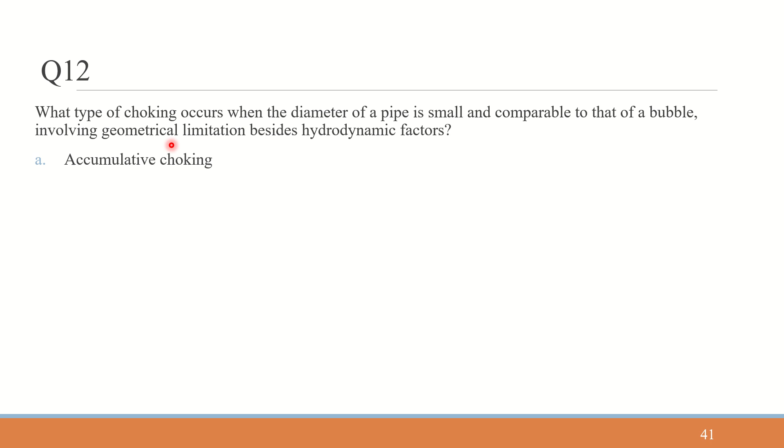Option A, accumulative choking, false. Option B, classical choking. Option C, blower or standpipe induced choking. Option D, all the above. The answer is classical choking, because when the size of the bubbles reaches the size of the column or pipe, we call it classical choking.

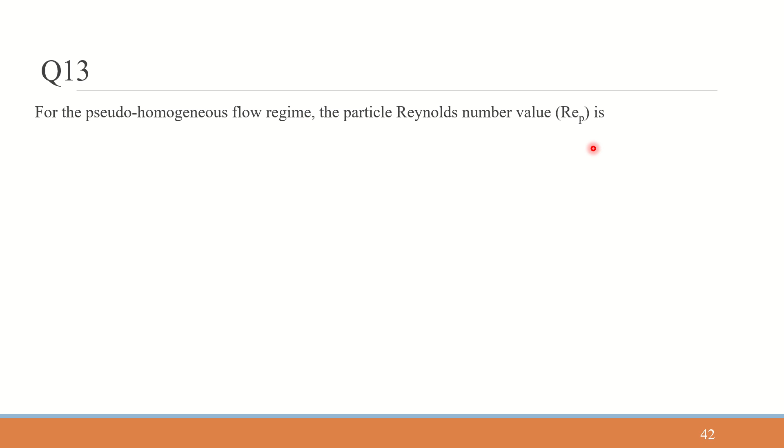If it's greater than 0.1 and less than 2, it's pseudo-homogeneous flow regime. If it's less than 0.1, we call it homogeneous flow regime. And if it's greater than 2, we call it heterogeneous flow regime. So in this range it's pseudo-homogeneous, in this range homogeneous, and in this range heterogeneous.

Now I think it's clear. If it's less than 0.1 but greater than 10 power minus 6, it's homogeneous flow regime. If it's less than 2 but greater than 0.1, it's pseudo-homogeneous flow regime, and if it's greater than 2, it's heterogeneous flow regime. So the answer for pseudo-homogeneous flow regime is 0.1 to 2 — option B is the right answer.

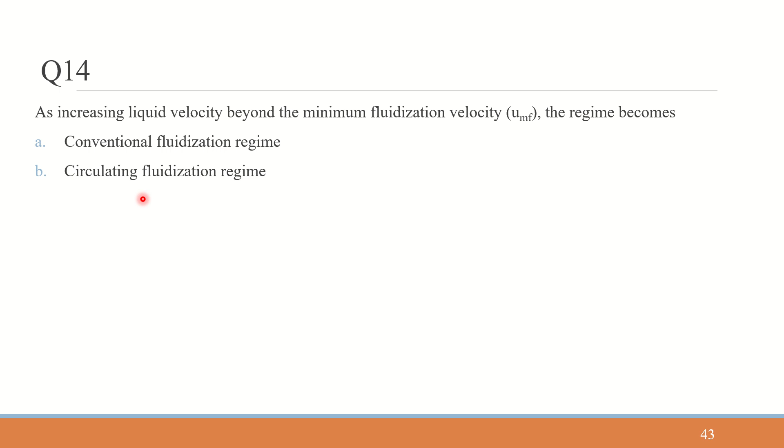Now question 14: increasing liquid velocity beyond minimum fluidization velocity, the regime becomes dash. Increasing the liquid velocity beyond the minimum fluidization velocity, the fluidization regime becomes dash. Option A, conventional fluidization regime. Option B, circulating fluidization regime. Option C, hydraulic fluidization regime. Option D, none of the above.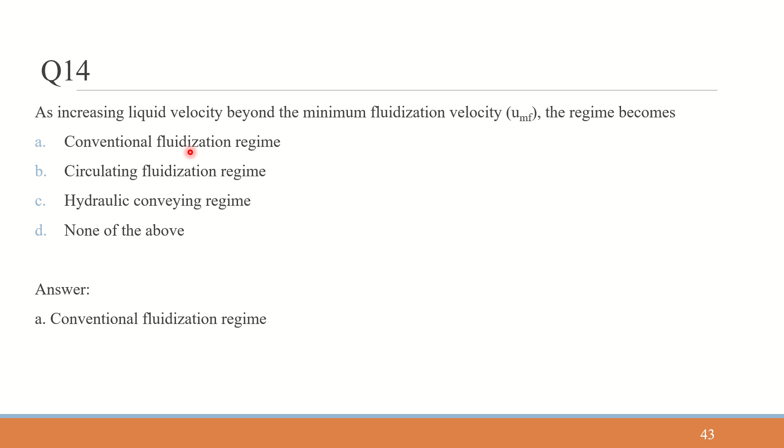The answer is: increasing the liquid velocity beyond the minimum fluidization velocity, the first thing to occur is the conventional fluidization regime. After that, with a very high increase in velocity, circulating regime and everything else comes into picture. But the first one, once we cross the minimum fluidization velocity, is conventional fluidization regime. So the answer is option A.

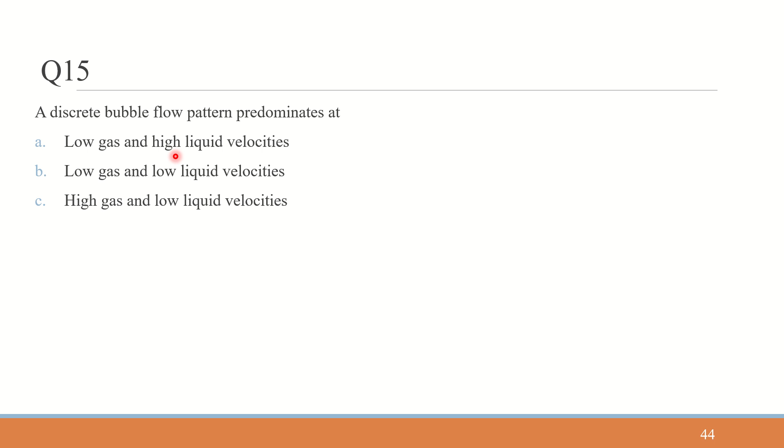Here we are concerned about the discrete bubble pattern, so bubble size is discrete — bubbles are discrete and identifiable. That happens when it is low gas and low liquid velocities. We are able to find the discrete bubble flow pattern when considering the gas and liquid velocities inside the bed: when both the liquid velocity and gas velocity are low, we see the discrete bubble flow pattern. That is question 15. Now we go to question 16.

Dispersed bubble flow pattern characterized by the small bubbles. Option A: it has less uniform size distribution than discrete bubble flow pattern. Option B: it has more uniform size distribution than discrete bubble flow pattern. Option C: it has equivalent size distribution to discrete bubble flow pattern. Option D: none of the above.

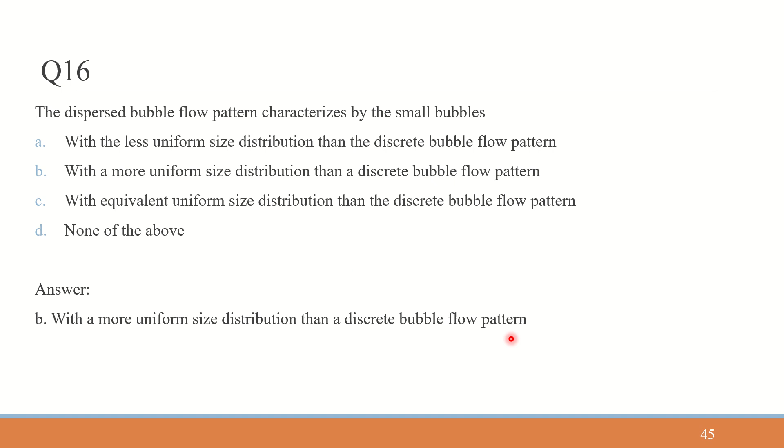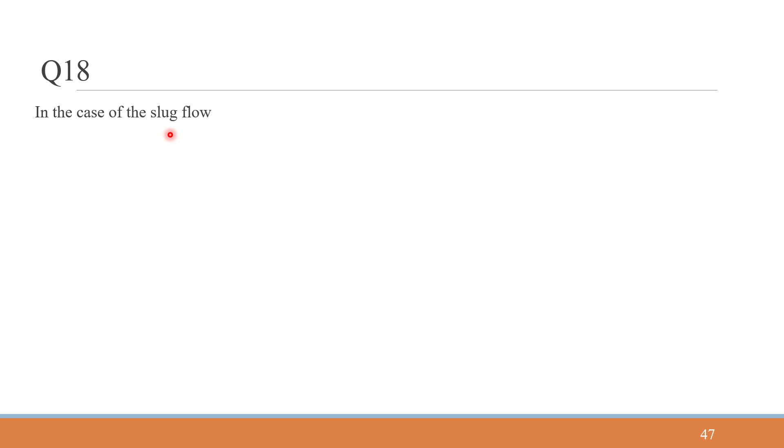Now we go to question 18. It is asked that in case of slug flows: Option A, as gas velocity is increased further, bubble becomes larger and more elongated. Option B, at low liquid velocity, onset of slug flow is almost independent of liquid velocity. Option C, at high liquid velocities, the transition from dispersed bubble flow to slug flow is a function of liquid velocity. Option D, all the above.

So we'll look at the statements first. In case of slug flow, as gas velocity is increased, the bubble becomes larger and more elongated - this is true, since increasing gas velocity causes bubbles to almost reach the size of the column and also become elongated. The second statement, that at low liquid velocity the onset of slug flow is almost independent of liquid velocity, is also true. At higher liquid velocities, the transition from dispersed bubble flow to slug flow is a function of liquid velocity. So all three statements are true, therefore the answer is all the above.

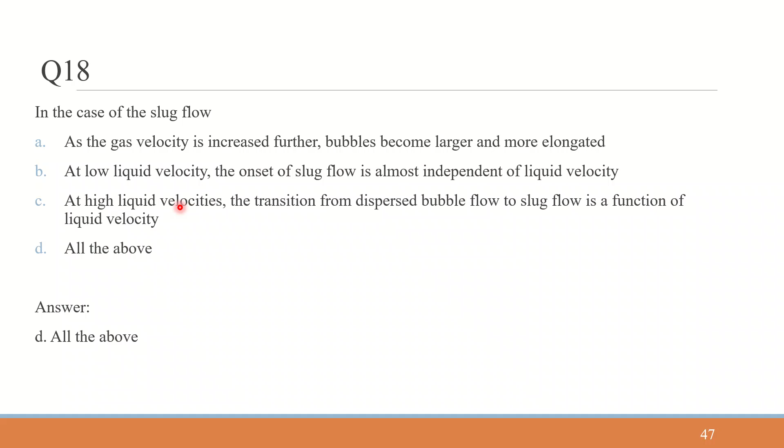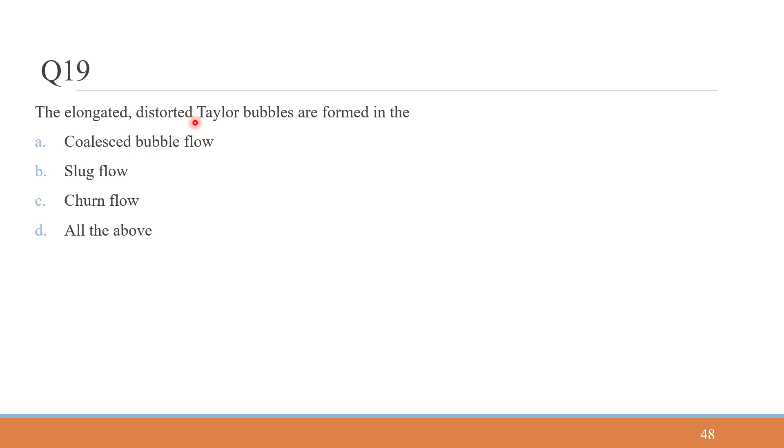So we'll go to question 19. The elongated, distorted Taylor bubbles are formed in: Option A coalesced bubble flow, Option B slug flow, Option C churn flow, Option D all the above. Churn flow is the right answer - the elongated, distorted Taylor bubbles are formed in churn flow. So the answer is option C.

Now we'll go to the last question of today's session. This is actually a problem from last week - question 14 from the week 2 assignment. I gave a solution for it last week, but there is one more approach to this particular problem which gives a more exact answer. Last week, the answer I gave was an approximate one, but here I'll give this additional approach which gives you the direct answer. So we'll see that problem - this is the last problem for today's session.

Calculate the terminal velocity for the sharp irregular sand particles whose density is 1.2 into 10 power minus 3 gram per centimeter cube and viscosity is 1.8 into 10 power minus 4 gram per centimeter second, and dp star is given by 160 micrometer and density of solid is 2.6 gram per centimeter cube, and phi s, that is sphericity, is 0.67.

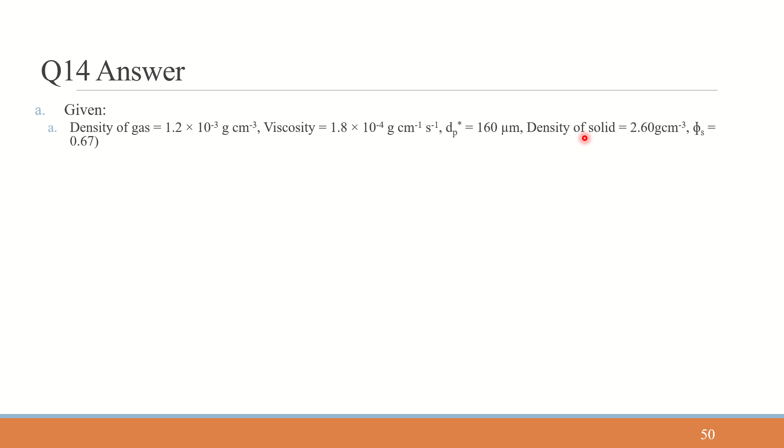And we are asked to find terminal velocity ut, and the formula is actually we are supposed to use three formulas. The first one is we need to find dimensionless diameter and dimensionless terminal velocity, and from this dimensionless terminal velocity we are to find the actual terminal velocity.

So first we need to find the dimensionless diameter. For that, dp star is equal to dp into rho g into rho s minus rho g into g by mu square, to the power of 1 by 3.

So dp star is given by 160 into 10 power minus 6, that is 160 micrometer, into rho g is 1.2 kg per meter cube, into 2600 kg per meter cube minus 1.2 kg per meter cube, into 9.81, divided by mu square, that is 1.8 into 10 power minus 5 the whole square, to the power of 1 by 3. That gives us dimensionless diameter as 7.28.

And from this dimensionless diameter, we are calculating the dimensionless terminal velocity. ut star is equal to 18 by dp star square plus 2.335 minus 1.744 phi s divided by dp star to the power of 0.5, whole to the power of minus 1. So again we are substituting everything and getting ut star as this.

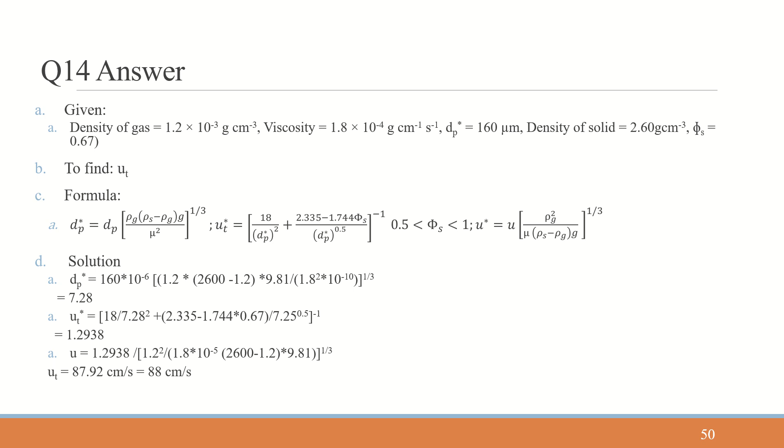Star is equal to... okay, it actually comes as only 1 point... I don't know why. rho g square, 1.2 square. Okay, I'll just confirm this again in the next class.